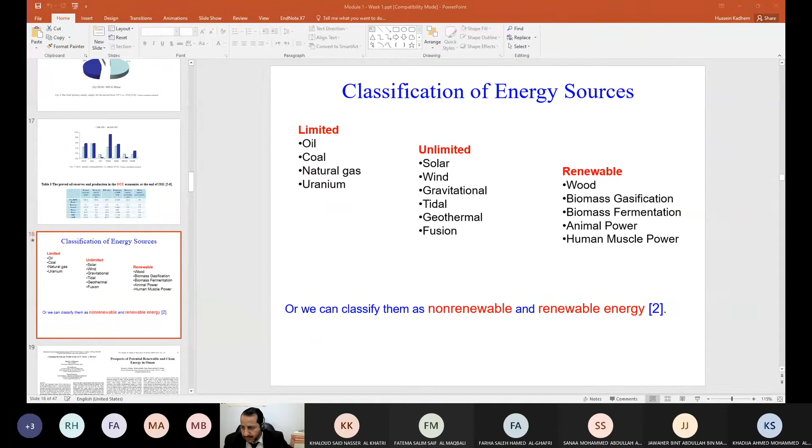Just to remind you regarding the last session, we started talking about the definitions and principles of energy, work, power, and the relationship between them, the different units used to calculate energy, prefixes, and gave an example of how we calculate efficiency based on primary or final end-user energy source. I also showed you the global situation of energy and focused more on the situation in the GCC countries.

Today I will classify energy sources and give a brief on each one of them, renewable and non-renewable, and try to compare between the situation in Oman and what's going on in the United States.

Sometimes they define it based on limited and unlimited type. When they come to oil, coal, natural gas, they are limited, fossil fuel, but limited sources of energy. When they come to solar energy, wind, gravitational, tide, geothermal, these are not limited energy sources, because as you know, solar energy, every day the sun is shining and we receive the same amount of energy, and we can utilize it, and the next day it comes again and again. So this means it's unlimited.

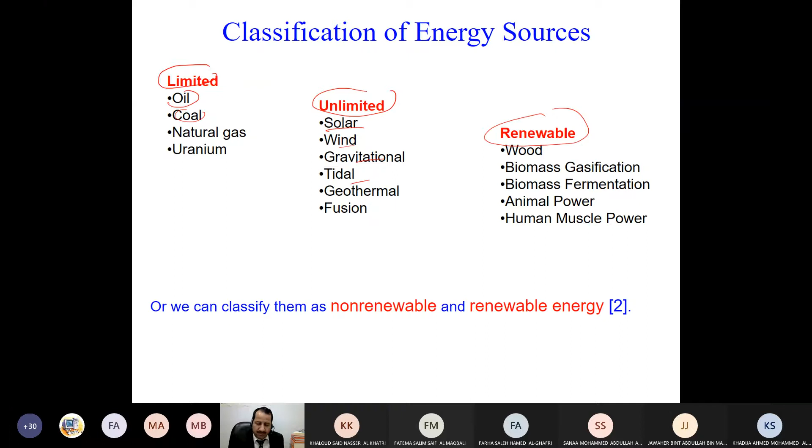Before I start talking about them, there are really interesting papers published in 2011 and 2016. One from 2011 talks about the situation in Oman, the prospect of potential renewable and clean energy in Oman, which I published. I will drop these to you from time to time, sending papers related to the topics I'm covering which will be useful to expand your information. The second one is about changing the energy profile of GCC states, a review.

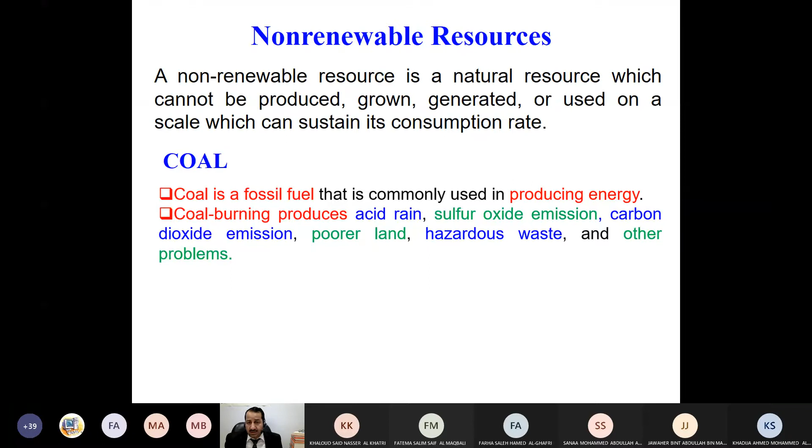Now, non-renewable energy. I will start with coal. You know coal, we use it for barbecue, right? Coal is a type of fossil fuel, available in our nature, used to produce energy. In the past they used it for cooking and heating, and later, around 100 years ago, they used it for engines to produce heat and rotate the engines. But the problem with this type of energy source is its pollution. It's heavily polluting, causing acid rain, sulfur oxide emission, carbon dioxide emission, hazardous waste, and other problems.

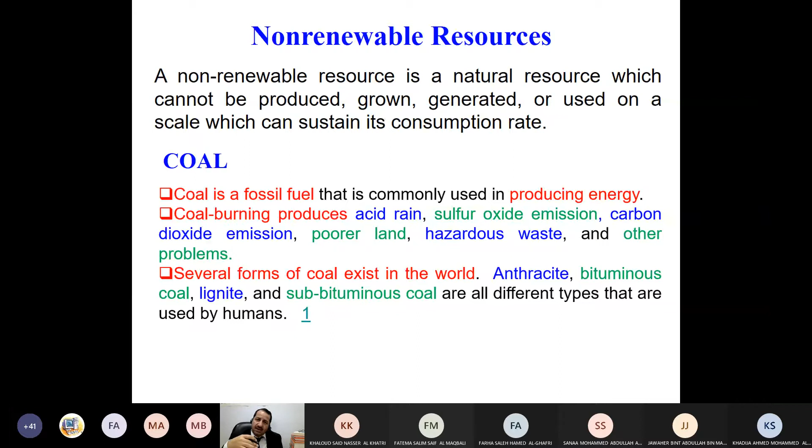It's also worth mentioning there are different types of coal: bituminous, lignite, and anthracite. You don't need to remember these names, but just know there are different types of coal, based on quality and how it forms in nature. So we can classify them as good quality coal and low quality coal.

In the United States and many other countries, they depend on coal mainly to generate electricity. Why? Because it's cheap and available in their nature. One of the advantages of having resources in your own country is you don't need to import it from outside, you don't pay for it, it's there available, you just need to utilize it directly. The United States depends on coal because it's available in their nature, and still today. So they may be one of the highest polluting countries in the world.

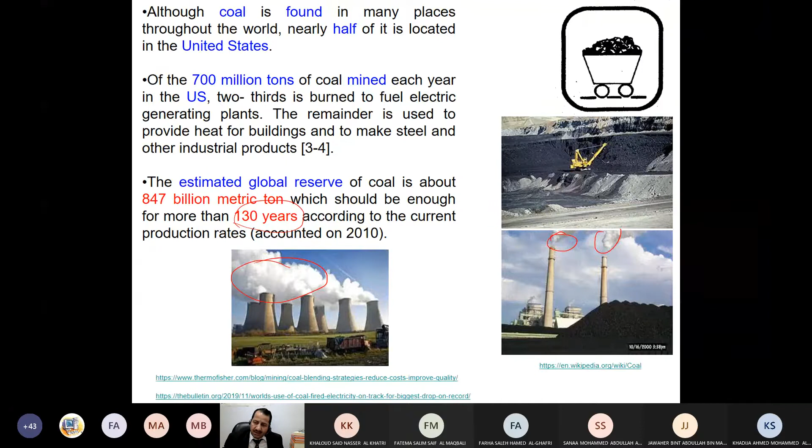But coal, as I mentioned, is available in our nature, but it will not stay forever. One day it would deplete. There is an international study by IEA, the International Energy Agency, from 2010, saying there is around 130 years left if we continue with the same consumption, starting from 2010, before coal disappears from our world. So it's depleted, it's not renewable.

While talking about coal, it's worth mentioning that coal, oil, and gas are all fossil fuels. The expectation is that oil and gas will deplete in another 42 to 60 years - 42 years for oil, 60 for gas. So oil, gas, and coal will all deplete soon.

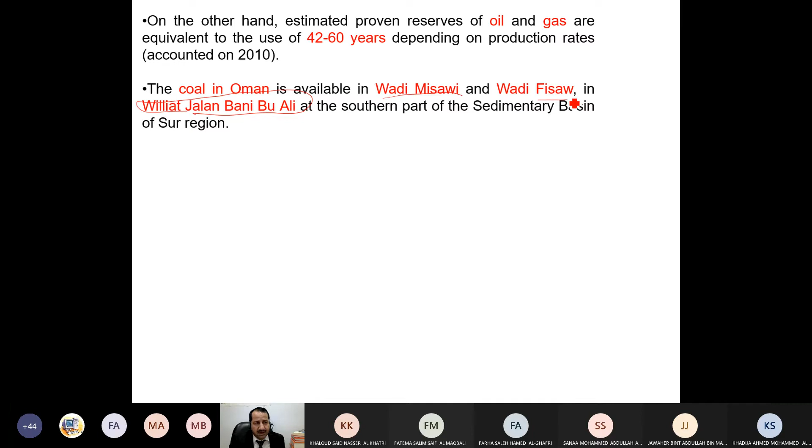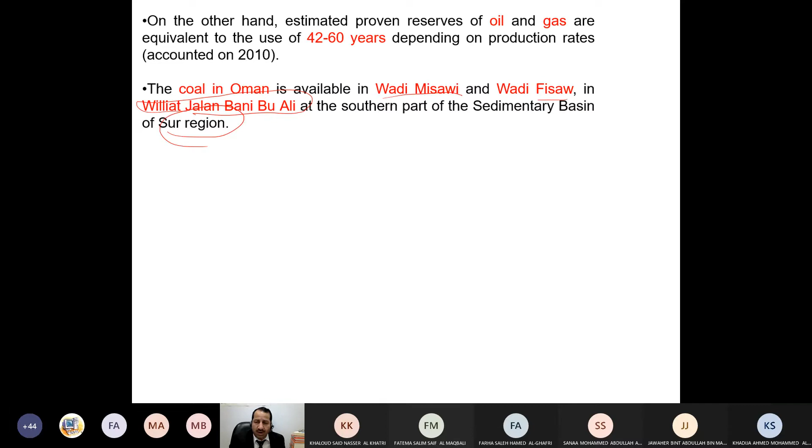In Oman, they found coal in Jalan Bani Bu Ali, a state located in two wadis. In the Sur region, there are huge mountains of coal there, and it's considered one of the best quality coals available in nature.

There was a plan around 2007-2009 to invest in using this coal by building a power plant of around 1,000 megawatts, similar to one established in Africa. They wanted to use it.

I attended the meeting at that time in Muscat, where they decided not to go in this direction after a long process, because they knew it would cause pollution problems - not only CO2, but ash and other hazardous materials. They concluded this was not a good option, and I totally agree with them.

There is good estimation that if they use this coal in Oman to produce energy, it would last for a long time, but at the end it will deplete - taking into consideration also the huge amount of pollution coming from this type of source.

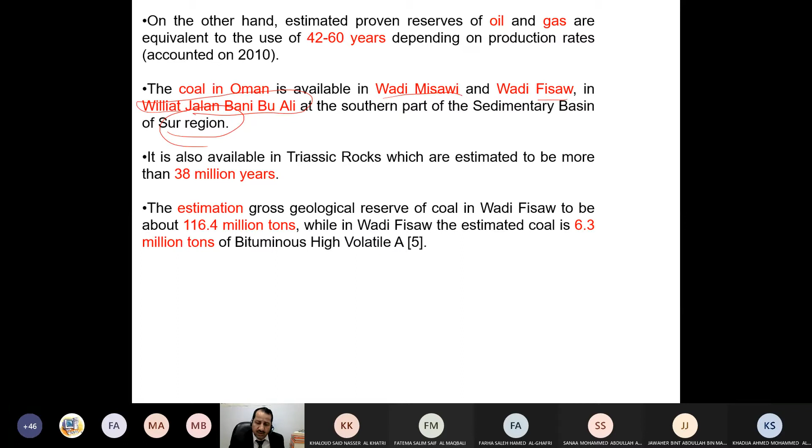The other source is natural gas, which is also non-renewable energy. Natural gas represents mainly methane and primarily ethane - we will talk about these when we discuss biomass, including the natural gas or gas coming from biomass.

Now, it's produced either biologically or thermogenically - thermally under the ground. It comes along with the production of oil in the rigs, either in the ocean or on the land.

Now you see the fire there - this is similar to the fire coming from the tunnel, or the chimney. This is natural gas. They burn it because if they leave it without burning, it would explode and destroy everything. So they try burning it.

Some countries try to produce it properly. Besides producing oil, they have a process for producing the natural gas and saving it in containers for use. One day others will reach this point too and invest in natural gas as well.

Anyway, natural gas is produced under the ground with the oil - it comes with it. We use it at home by putting it in a small cylinder similar to this. Oman is one of the countries producing natural gas.

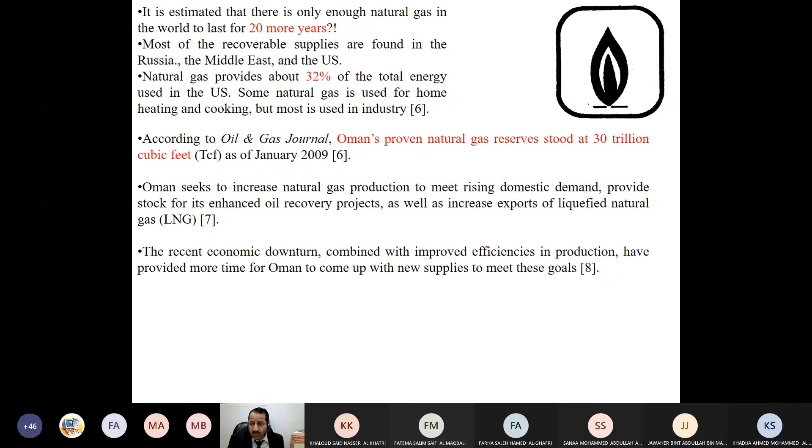Today, Oman brings natural gas from Qatar, and the expectation is that it will bring natural gas from Iran through a pipe under the sea. I will talk about diversity later on, but we cannot continue in this trend the same way - we need to make some changes.

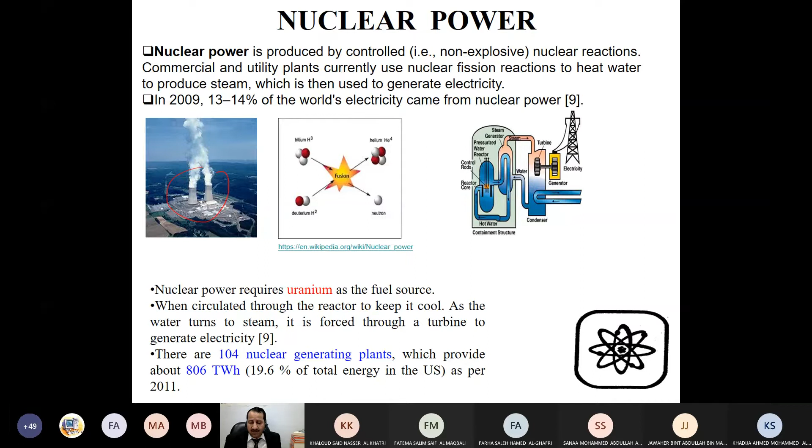But two disasters happened: one in 1986 in Chernobyl, Ukraine, and the second in 2011 in Fukushima, Japan. These two disasters were enough to send a message that we need to think in a different way. When a nuclear disaster happens, it will stay for 100 years, if not thousands of years, so it's not worth it. We need to look for alternatives.

Oil, maybe this is the last part of non-renewable energy. They expect oil will deplete in another 42 years, starting from 2010, according to a report published by the International Energy Agency. The point I would like to highlight here is...

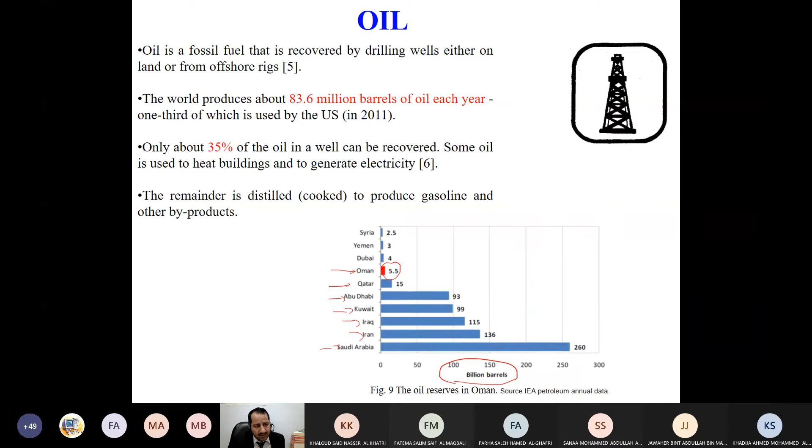This doesn't mean there are no other reservoirs, but this is the discovered amount. More exploration is needed, more investment in this direction is needed. For the time being, this is the reserve we're talking about, as of 2010, published by the International Energy Agency.

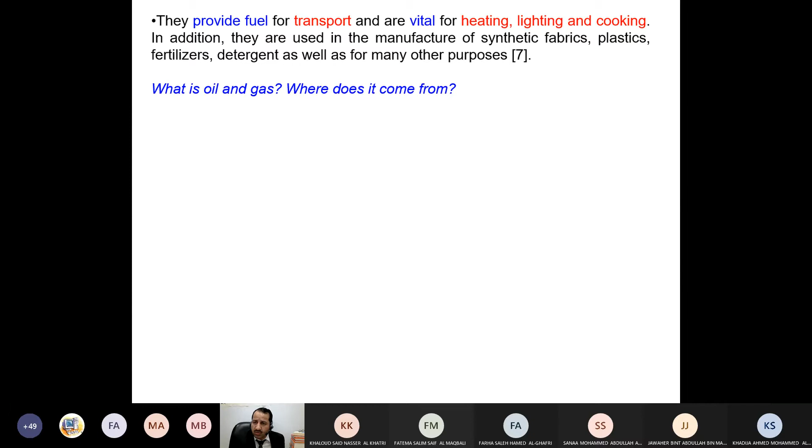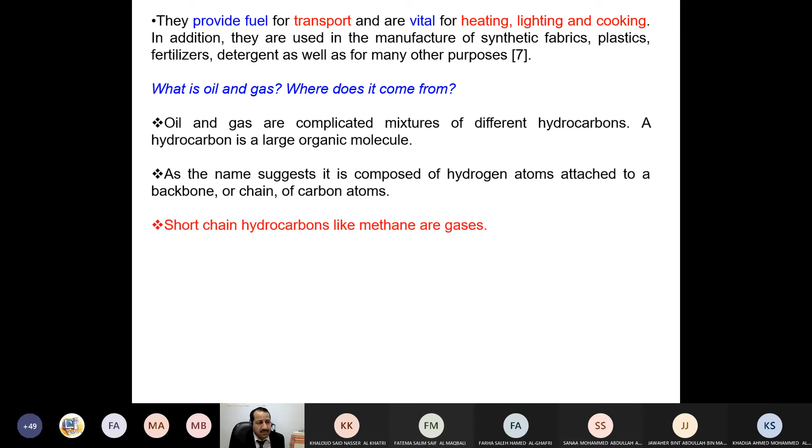Oil, coal, natural gas, all of them are used mostly for generating electricity, to produce heat for cooking, for heating buildings, for lighting. At the end, the three types, oil, natural gas, and coal, are all, frankly speaking, part of hydrocarbons.

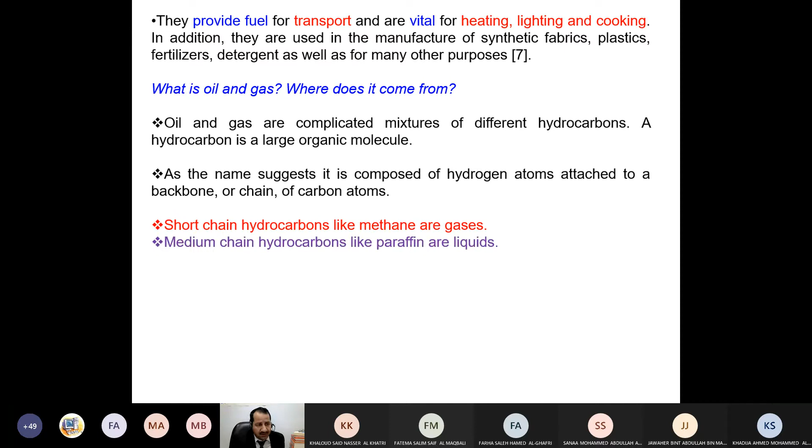Hydrocarbons, hydrogen with carbon, connect in different ways to produce either solid, liquid, or gas. Chemical people are more familiar with this, where carbon links with hydrogen to produce chains, either long, short, or medium. The short chain is natural gas, methane; medium is paraffin; and the long chain is the solid, which is bitumen.

Let me see this video. No, it's not available. Okay, just one second, let me...

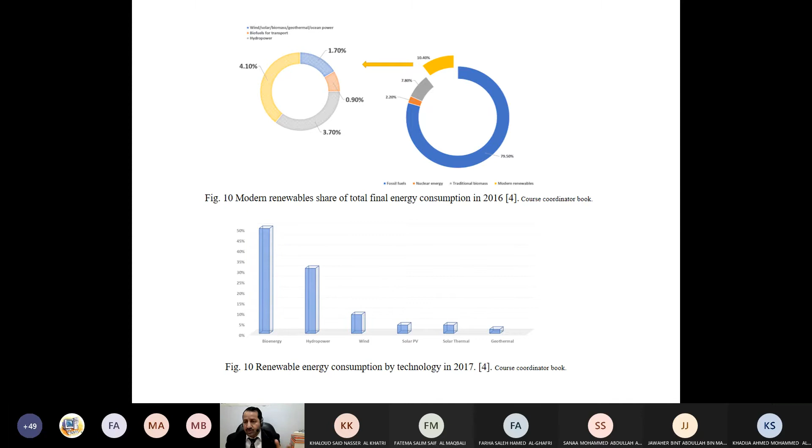But if we come to Oman, up to 2015, 16, there is 97.5% of power generated by electricity coming from natural gas and 2.5% from diesel in some rural areas, example Masira and Duqm, some places. So we are depending almost on natural gas. There is no diversity here. We need to think how to have different sources of energy, renewable and non-renewable, combine them, and each one of them have its share.

Now, for renewable energy, I'm giving here a brief introduction. Otherwise, we will do the design and the calculation later on, inshallah, in different sessions.

Geothermal energy is the energy under the ground. It's coming as heat, either from hot rocks, hot water, or hot steam. You may have seen it in some places, as example in Rustaq, okay? And some other places, I counted maybe 55 holes in Oman which have geothermal energy. You can see here some photos and some links if you would like to read more about them. In some countries, there is a huge amount, or say potential, of geothermal, so they use it.

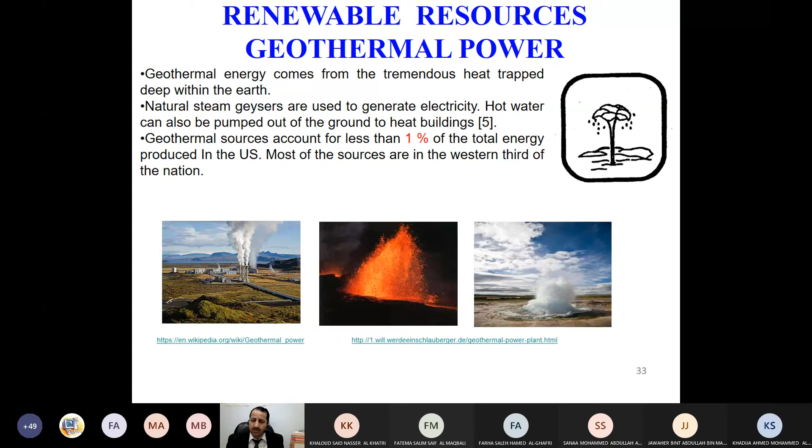In some countries, it is less. The application for them is different, starting from small, medium, large, either for heating and ventilation at home, for heating water, for generating electricity, or for industry, or for other applications. Also, we will discuss them in more detail later on.

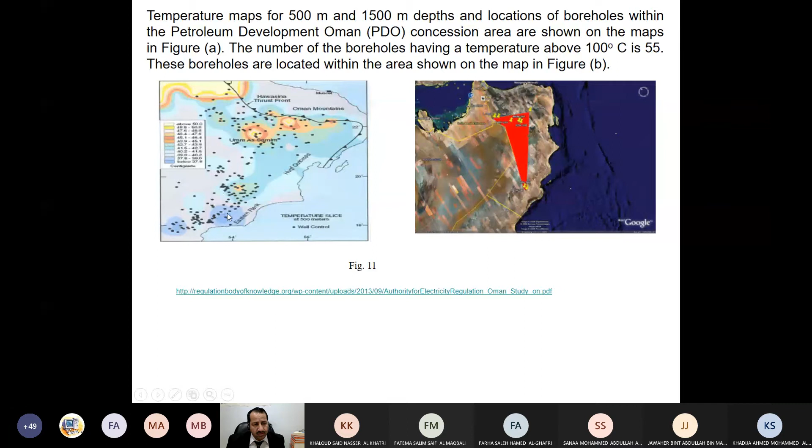Here in this map of Oman, you can see some holes which contain geothermal energy. The temperature is good enough, 55 above 100 Celsius.

The other type is biofuel. Biofuel is coming from biomass. What we do is, from the agriculture sector, we have waste coming from this sector. So what we are going to do is use some technology to convert it into fuel: methanol, ethanol, biodiesel, and so on. And you cannot say there is a country without residual or waste coming from the agriculture sector.

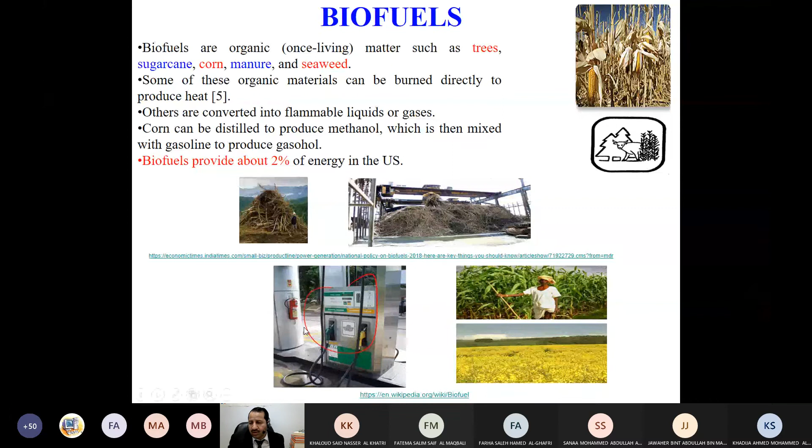As you can see, all these wastes convert into fuel, and we use it to supply fuel for transportation vehicles. Some countries use more or depend more on biomass or biofuel, and sometimes use less.

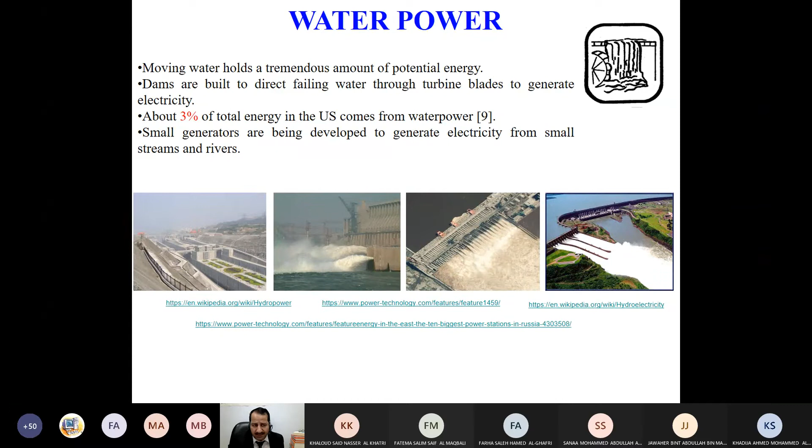Water power: there is a huge amount of energy available in water, which covers around 70 to 73% of our planet. This water could be saved in a dam, similar to this, as you can see here. It's not only for generating electricity, also for supplying water for agriculture, to have a water policy for this country. But at the same time, this huge amount of hydraulic energy is used to generate electricity, because it falls and rotates a wheel connected to a turbo generator and generates electricity.

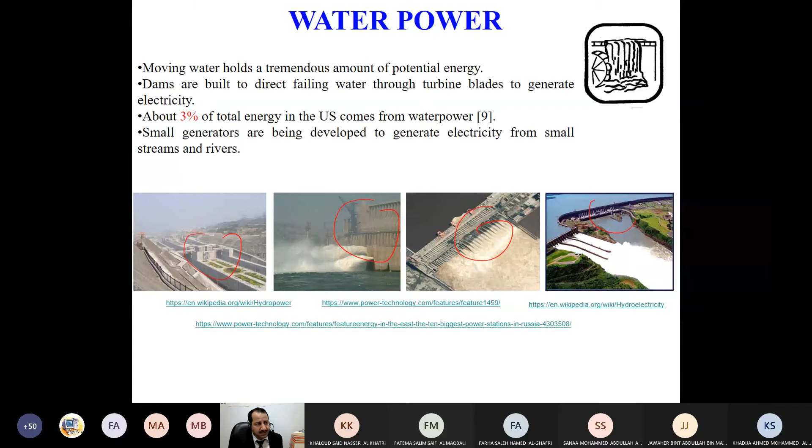The conventional one has been used for a long time. We will discuss it and design circuit systems in this direction. But this is not the only type. From water, we also have tide, wave, and OTEC.

For wave, the water wave, this is mechanical movement. If we know how to extract it, and I will show you how we extract it later on, we use a turbo generator similar to this one, like a snake, and then we capture the mechanical energy, we generate electricity, and we use it. OTEC, ocean thermal energy conversion, also we will design and discuss this one.

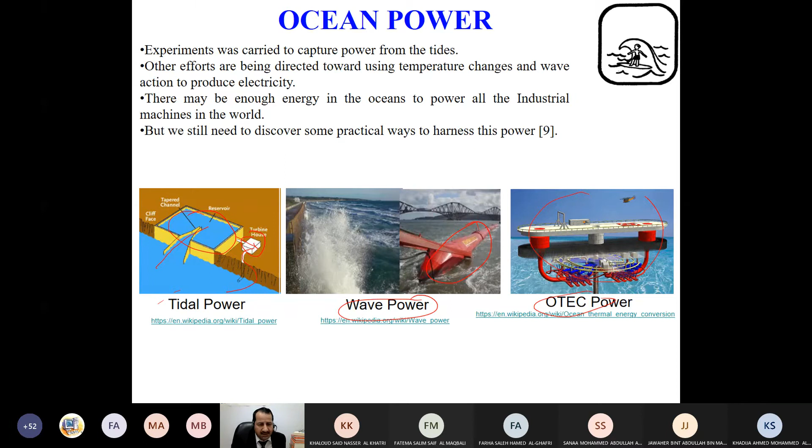It's the difference in temperature between the surface of the sea and down deep in the sea. We will learn how we utilize it to generate different types, not only energy, but different types of material and byproducts.

I left solar and wind to the end because, as you know, solar and wind are the priorities for Oman, based on many studies published by the government. Solar radiation comes every day, and we have spectrum. We will spend maybe 6-7 hours related to solar, to see the different methods, the technology approaches used to capture this energy, where to use it, and how we design the system. So our priority in this course is to focus on solar.

Later on, we will discuss it in more detail. But the solar energy coming from the sun has two elements: light and heat. We capture light through what we call a solar cell or photovoltaic, to convert it directly into electrical current, electricity. And the second one, heat.

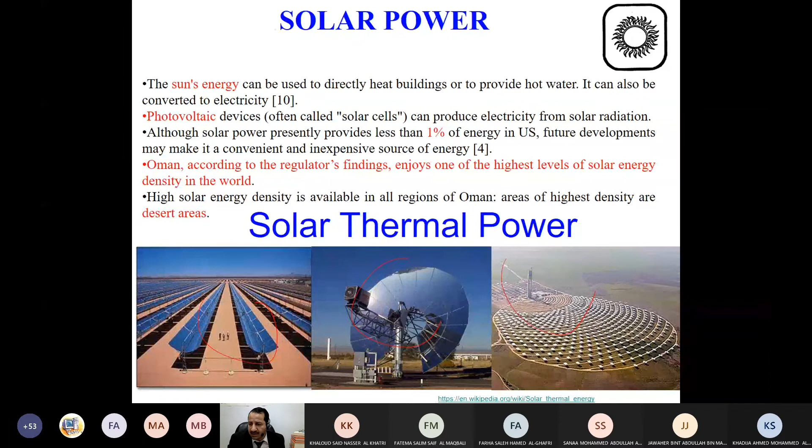And we start seeing this. It's not merely something theoretical, not available in our world. We see solar cells - if you come to our lab in Sohar University, you will see solar cells. If you go to some places here in Sohar University, you see some applications using solar. If you go outside, you see in many places, some homes have solar cells today.

Wind is an indirect reflection of solar energy. As you can see, our planet has land and water, and their heat capacity is different - some heat faster than the other. For example, on a day when solar radiation comes and the sun is shining, the land heats faster than water. So if it's hot here, the air gets hot and rises as warm air. Due to the pressure difference, here it goes down because it's colder.

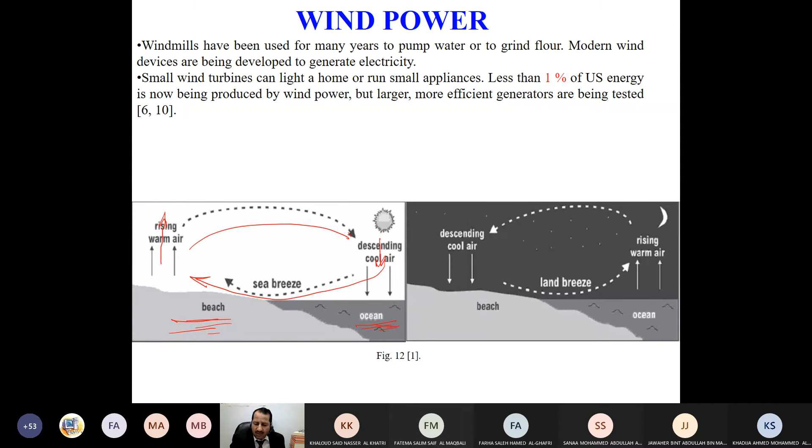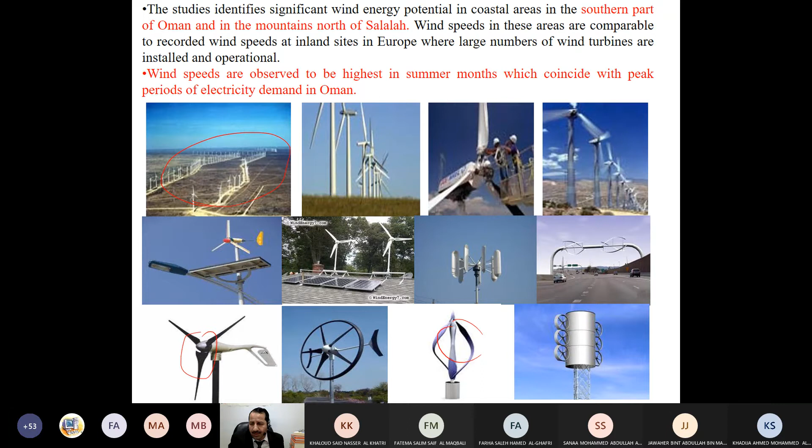Now, you might say, what is the credit for solar besides being renewable, more environmentally friendly, and free? When we talk about the amount of renewable energy available in our world, it motivates and excites us to utilize it. I will give an example here.

You know, the oil available on our planet took 200 million years to be created under the ground. Thermogenically, under the ground with high temperature and pressure, it's created from biological things. How much is the reservoir and non-reservoir? It's about 2.2 trillion barrels of oil. So in 200 million years - I'm talking about numbers here so I can explain the idea - 200 million years is what it took the planet to produce 2.2 trillion barrels of oil.

Now, each barrel of oil produces 5.8 million BTU - you remember BTU, British thermal units? This is the amount of energy. So if I divide 2.2 trillion by 200 million years, it tells me that every year on our planet, around 11,000 barrels of oil are produced, for 200 million years. Now, if I multiply this by 5.8, it tells me that yearly, we have oil producing 63.8 billion BTU per year.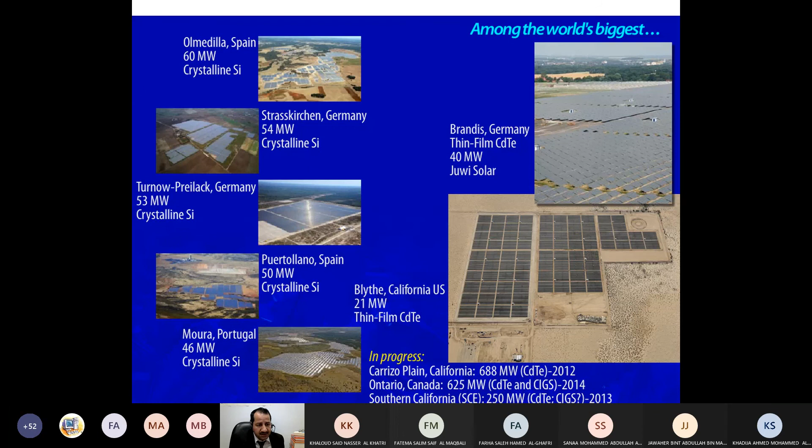I will stop here and happy to receive your questions.

I'm still introducing the course. I know that with examples of problems you will be enjoying more, but this is to come, as I mentioned, in session number 4. Until that time, we need to introduce the principles, the overview of the topic, definitions. Do you have a question?

Seem to be you are tired and looking for your lunch. Okay, I will stop here, and yes.